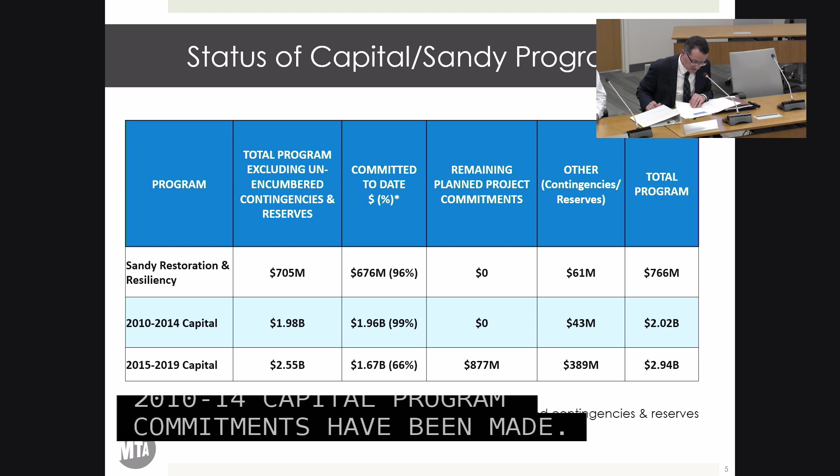Good afternoon. Welcome to Bridges and Tunnels Annual Capital Program Update. In today's presentation, I'll provide updates on our overall program status and major completions, as well as updates on specific programs at the RFK, Henry Hudson, Verrazano, and Throgs Neck bridges. First, overall status. This slide shows the overall status of the capital and Sandy programs. To date, all planned Sandy and 2010 to 14 capital program commitments have been made. We've also committed approximately 2/3 of the 2015 to 19 capital program projects.

Now I'd like to discuss our 2018 commitments. In 2018, B&T committed $730 million of planned $800 million in commitments. In 2019, we plan to commit an additional $877 million.

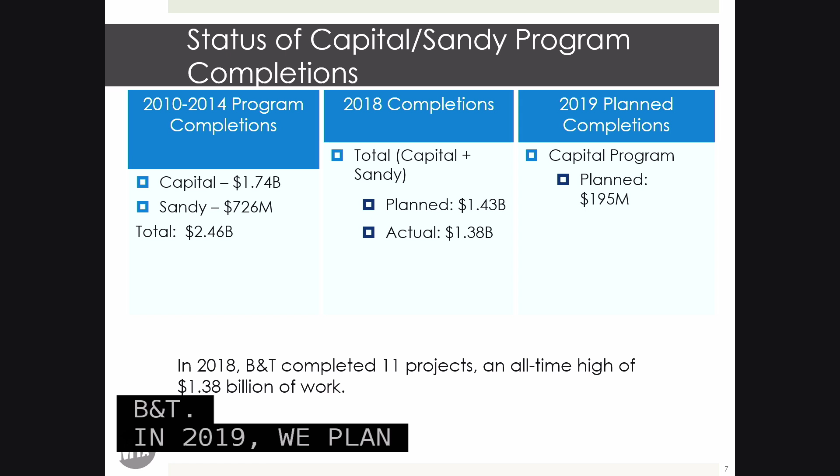This slide shows the status of B&T's program completions. We've completed over 90% of our committed 2010 to 14 capital program projects and 100% of the committed Sandy program projects. In 2018, we completed 11 projects totaling $1.38 billion, which was an all-time high for B&T. In 2019, we plan to complete an additional $195 million of work. We'll now show a short video highlighting our major completions for 2018.

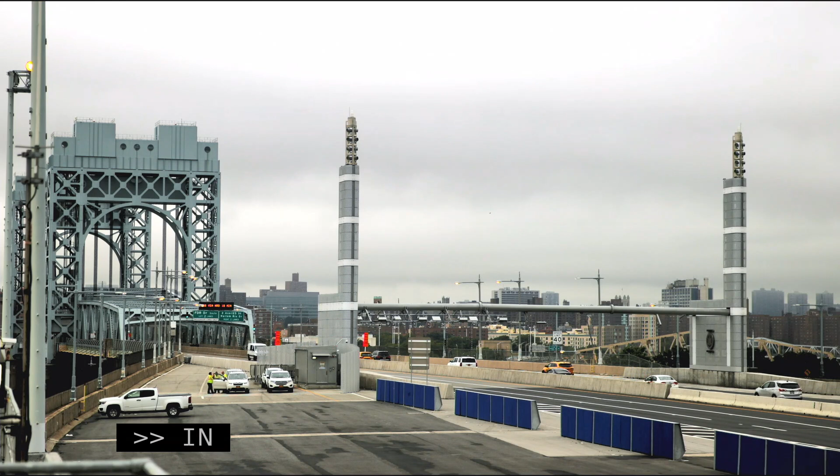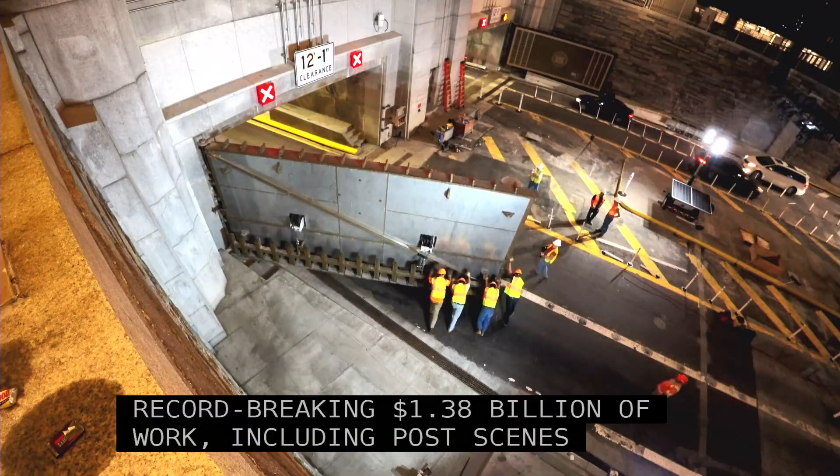In 2018, B&T completed a record-breaking $1.38 billion of work, including post-Sandy reconstruction of the two tunnels, installation of tunnel flood protection, replacement of the Bronx Plaza roadway deck at the RFK Bridge, and structural rehabilitation and painting of the Marine Parkway Bridge. To repair the damage done by Hurricane Sandy to the two tunnels and to improve their resiliency, TBTA awarded 2 contracts with a total value of $588 million.

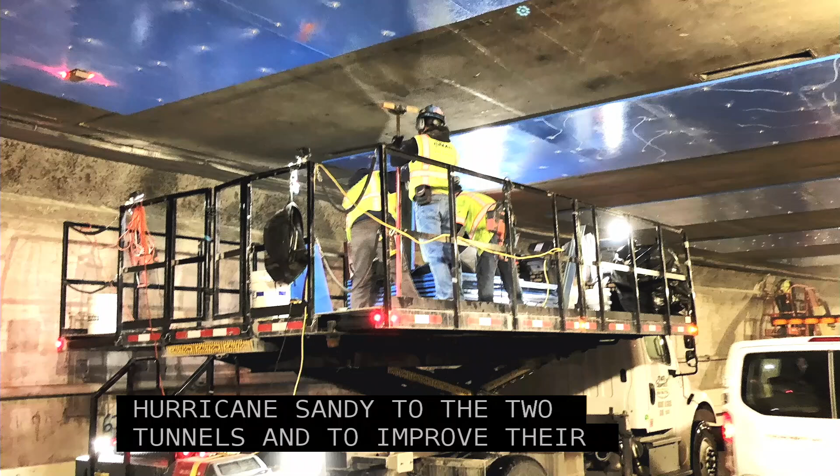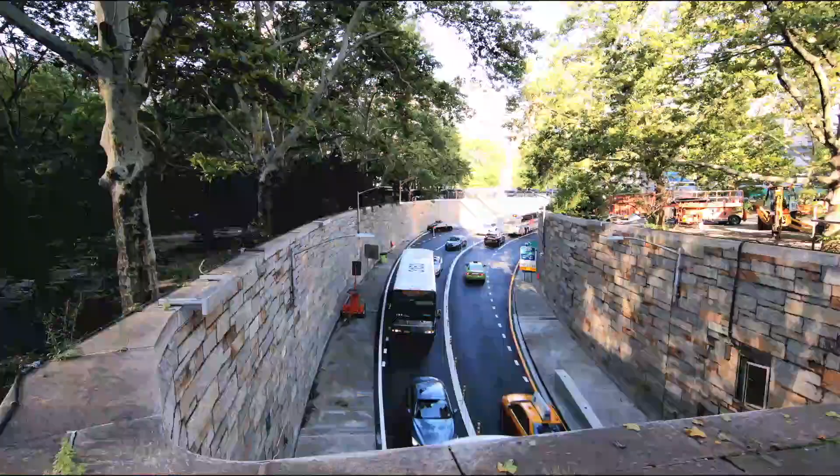New fire lines were cut into the tunnel walls, new fire-resistive ceiling panels were installed, upgraded tunnel LED roadway lighting, and an improved traffic management signage system was installed. The restoration and improvement work at the two tunnels was completed up to 11 months early, significantly benefiting the 140,000 plus customers who cross these two facilities each weekday.

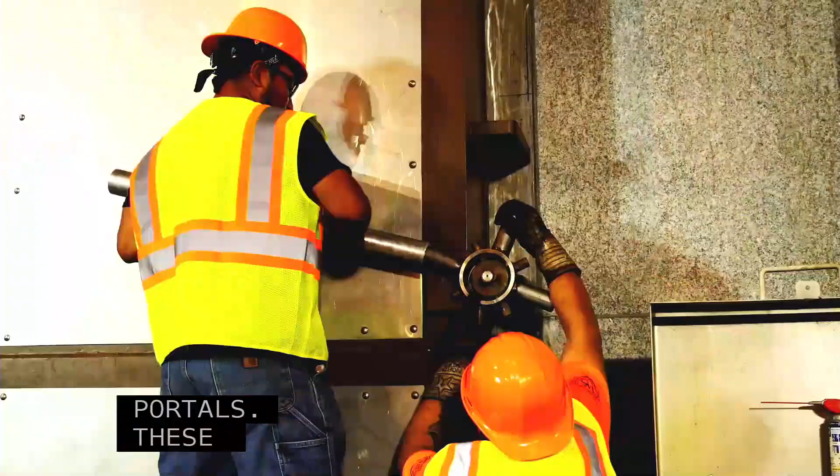To ensure that flooding of the tunnels can never happen again, TBTA has installed 8 flood doors at the tunnel portals. These custom-designed flood doors, weighing up to 50,000 pounds each, can be closed in advance of an expected flooding event, totally sealing off and protecting the interiors of the tunnels.

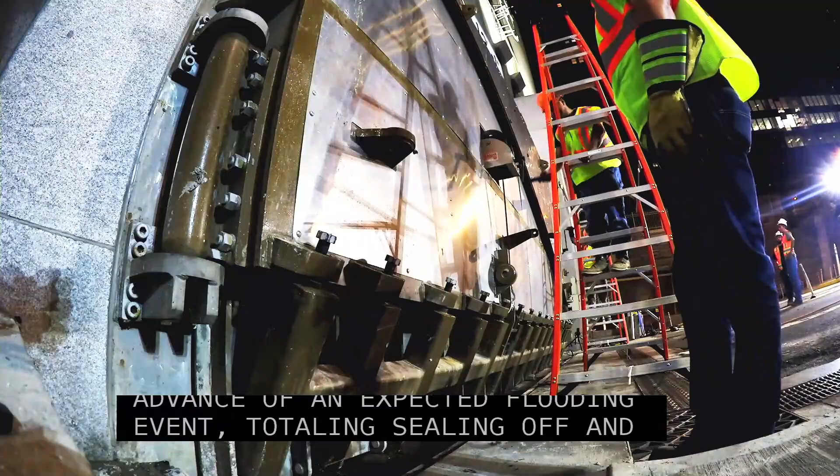In addition, the perimeter seawall around the Hugh L. Carey Tunnel mid-river ventilation building has been raised in height, as it came close to flooding during Sandy and is an area of concern. The tunnel flood protection system is designed to protect to the FEMA 500-year flood elevation, which is nearly 4 feet higher than Sandy peak flood levels.

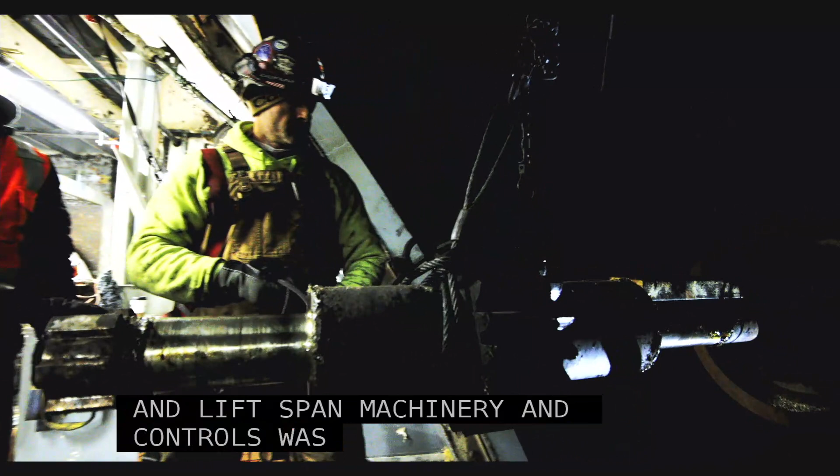At the Marine Parkway Bridge, $100 million in repairs and upgrades to the bridge structure and lift span machinery and controls was completed. All existing equipment was dismantled and removed from the machine rooms at the top of the towers.

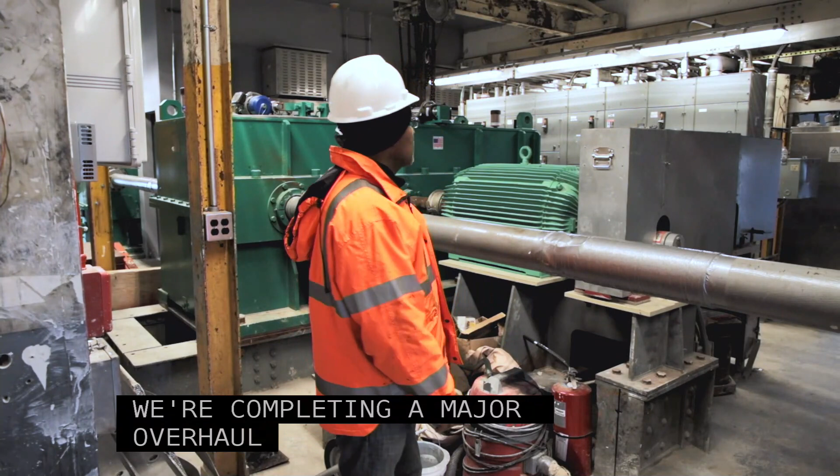Now we're entering the machinery room at the top of the south tower of the Marine Parkway Bridge. This machinery room houses the main lifting equipment for the lift span. We're completing a major overhaul of this lifting equipment. We recently replaced the original 1936 lift span machinery.

Some of the main components of the lift bridge machinery system consist of the motor control center, the primary gearboxes, and 4 electric motors. We have 2 200 horsepower normal motors that operate the bridge in the normal condition, and we have 2 50 horsepower auxiliary motors which operate the bridge if there's an issue with the normal system.

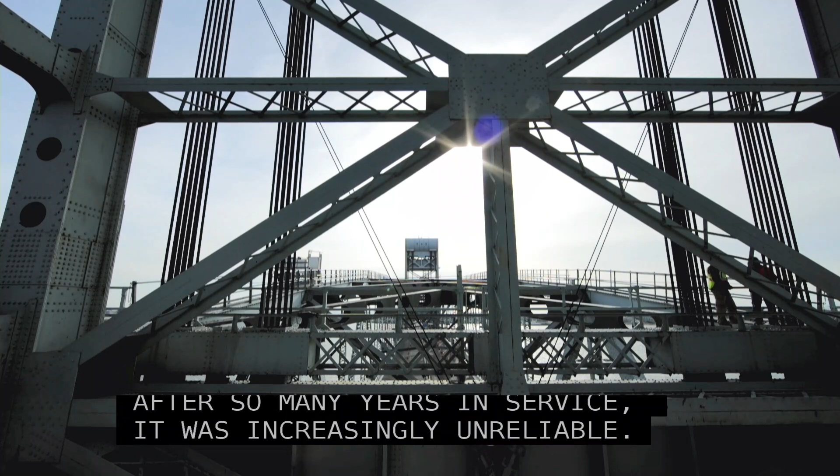This gearbox replaced the original 1936 gearbox. That gearbox served the bridge well. After so many years in service, it was increasingly unreliable. The new lift bridge mechanical system has been in operation for over a year now. In that time, it's performed flawlessly.

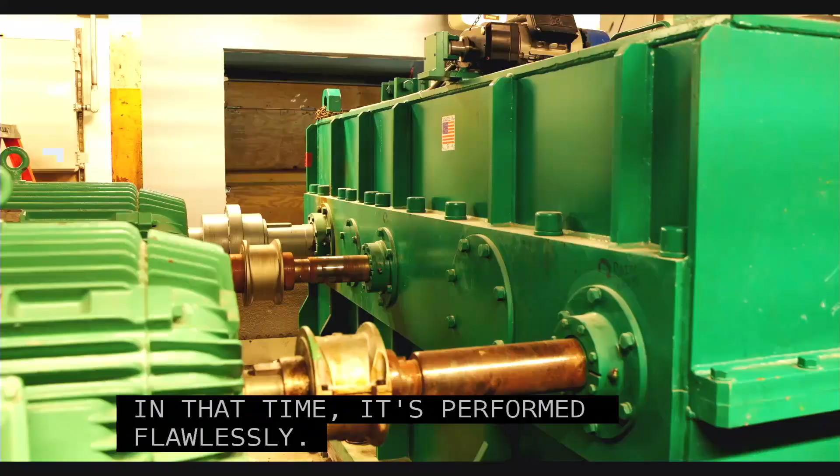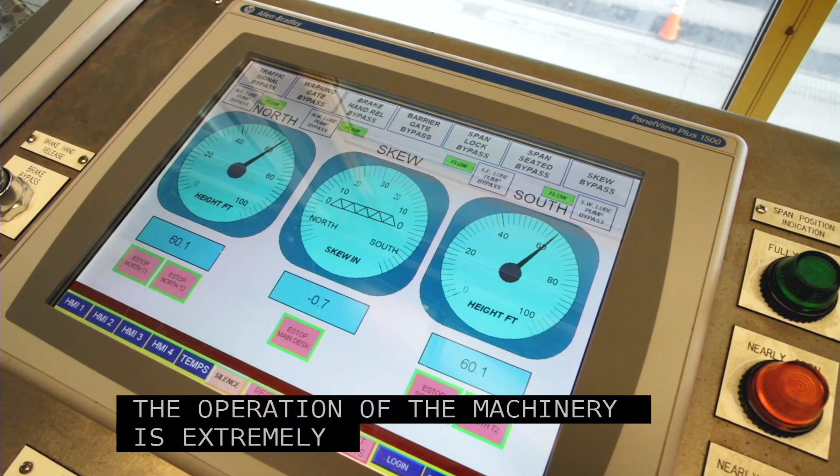It takes approximately 3 minutes to lift the bridge to full height. The operation of the machinery is extremely smooth. The computerized control system maintains the bridge in precise level while the bridge is being lifted and lowered. And in seating the bridge, there are no longer any issues that we had with the original operating system.

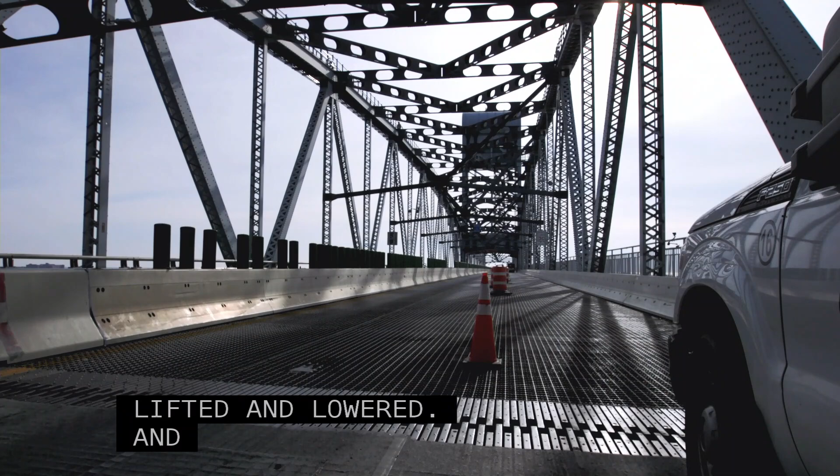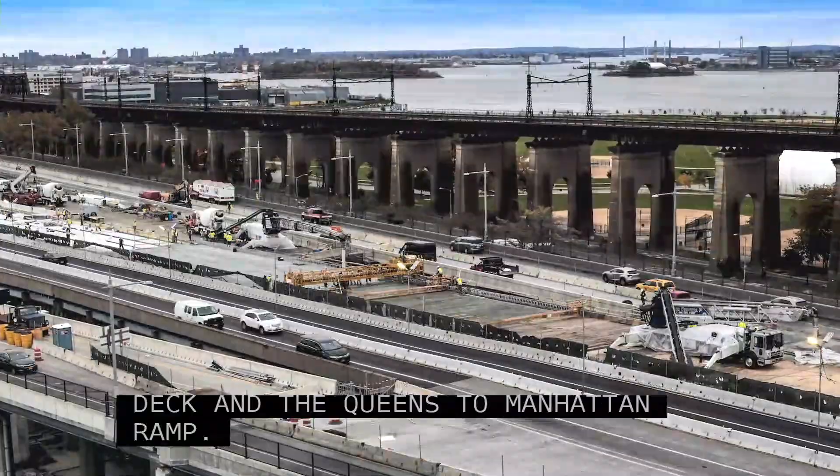At the RFK Bridge, Project RK65A reconstructed and reconfigured 230,000 square feet of the Bronx Toll Plaza roadway deck and the Queens to Manhattan ramp. The project was necessary to restore structural integrity of the elevated structure, to improve roadway safety, and to increase traffic capacity and efficiency.

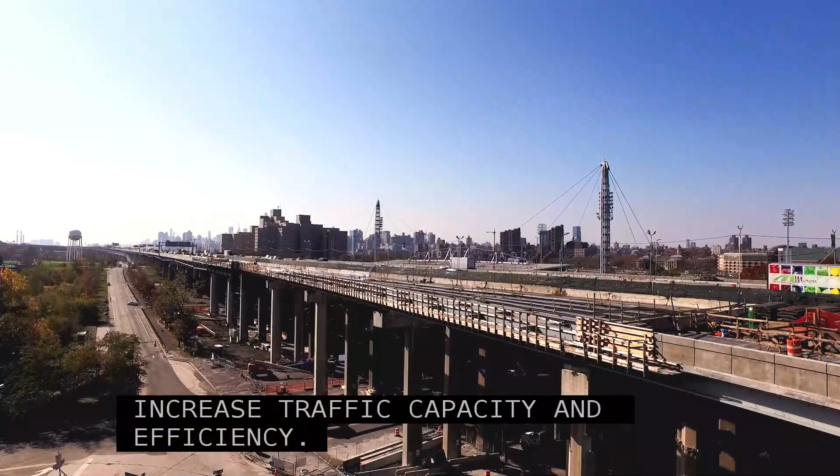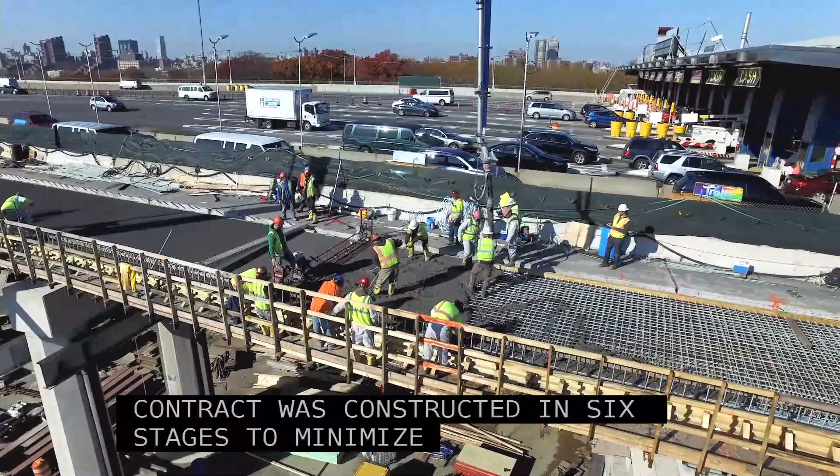This $238 million construction contract was constructed in 6 stages to minimize impact to the 100,000 customers who transit this area each day. The project also included rehabilitation of substructures, structural steel painting, seismic upgrades, new LED roadway lighting, improvements to roadway drainage, and installation of an emergency generator and a new 5 kilovolt electrical feeder.

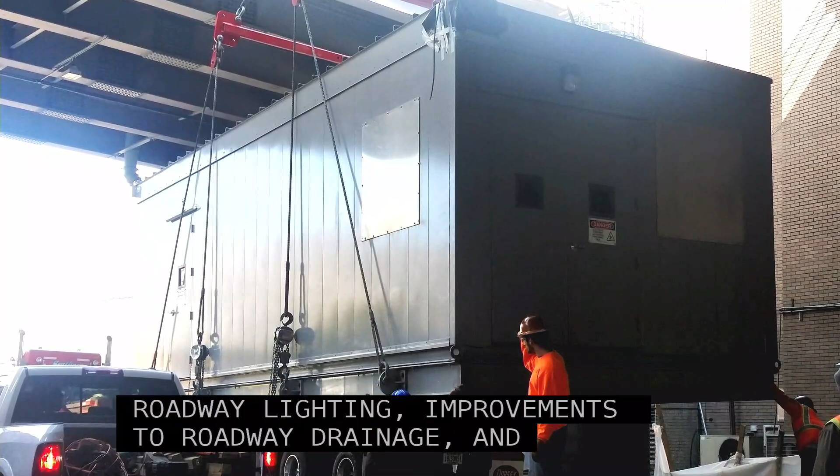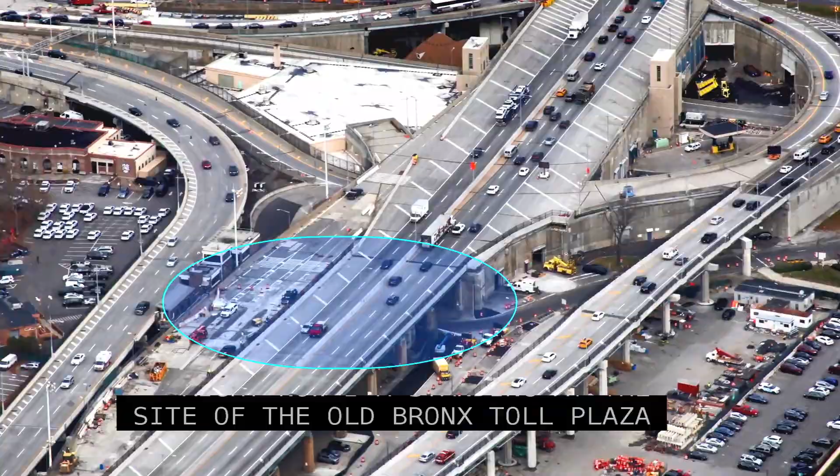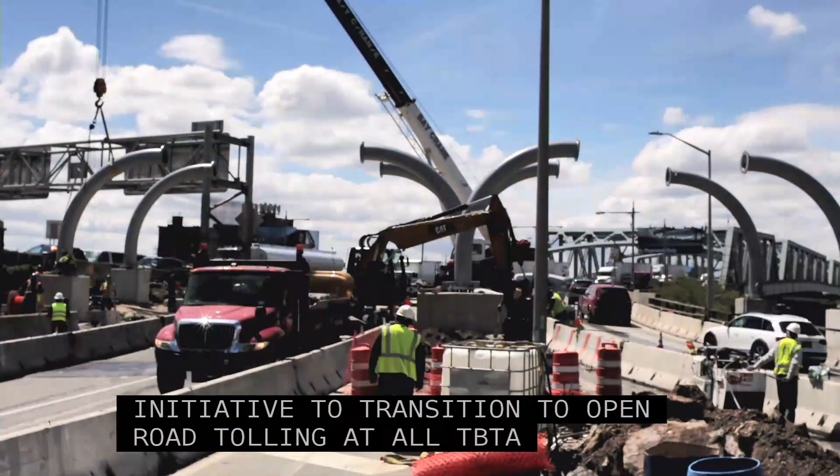Right now, I'm standing at the site of the old Bronx Toll Plaza, which was reconstructed under the RK65A project. As originally bid, the project was to construct a new 16-lane toll plaza. However, in June of 2016, as part of an expedited agency-wide initiative to transition to open road tolling at all TBTA facilities, the RK65A scope of work was modified to require the installation of open road tolling gantries at the Bronx and Queens approaches to the RFK Bridge, and for the demolition of the old Bronx Toll Plaza.

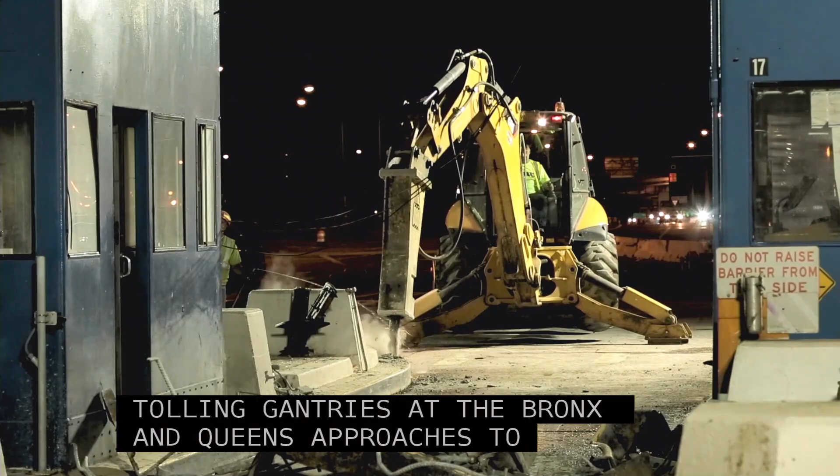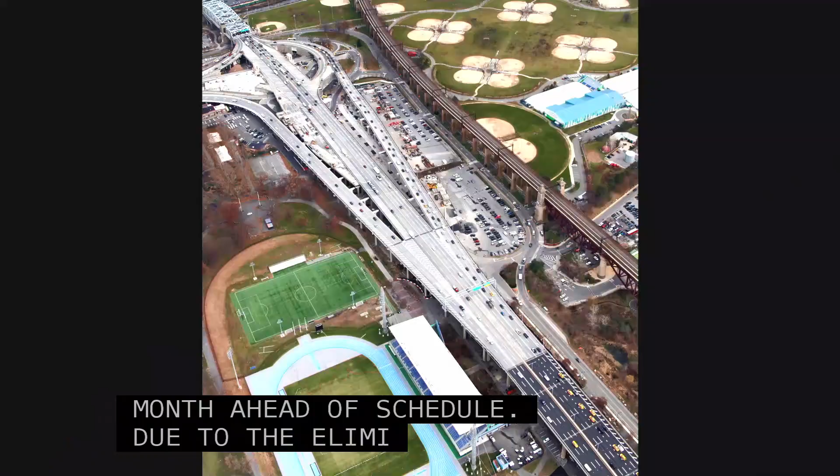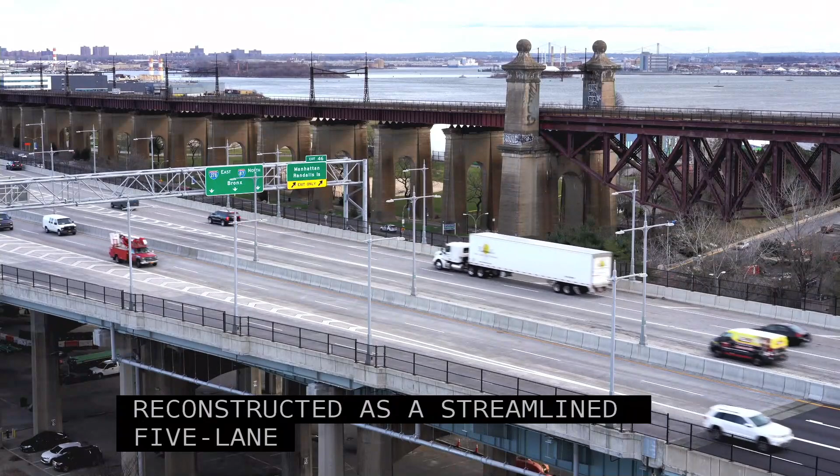As a result of a collaborative, fast-track design and construction approach, ORT Go Live at the RFK Bridge was achieved on June 15th, 2017, 1 month ahead of schedule. Due to the elimination of the toll booths, the old toll plaza area and approach roadways were reconstructed as a streamlined 5-lane viaduct featuring a new horizontal alignment to accommodate higher traffic speeds and improving customer safety and traffic throughput.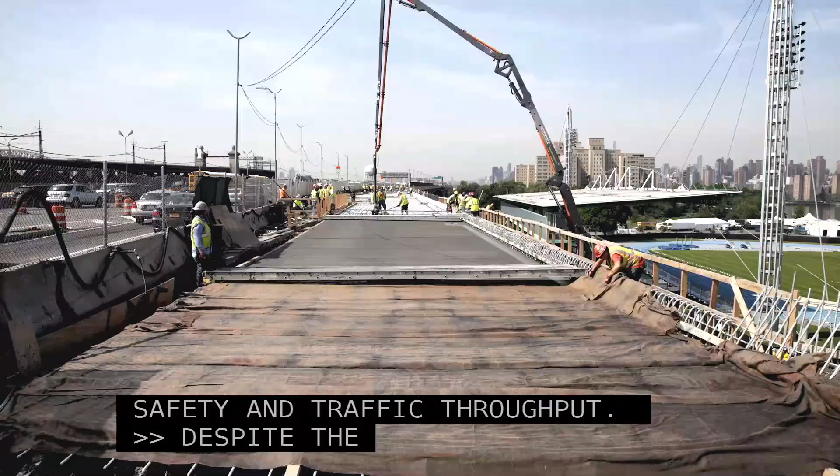Despite the change in scope to incorporate ORT, overall, the project was substantially complete October 31st, 2018, approximately 8 months ahead of schedule. Milestone work impacting mainline traffic was completed 3.5 months early, and the Queens to Manhattan ramp was completed 7 months ahead of schedule, with the contractor earning $2.7 million overall in early completion incentives.

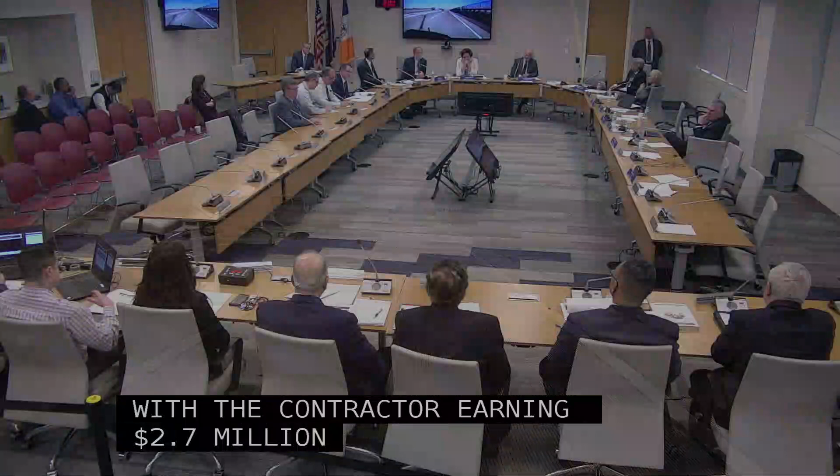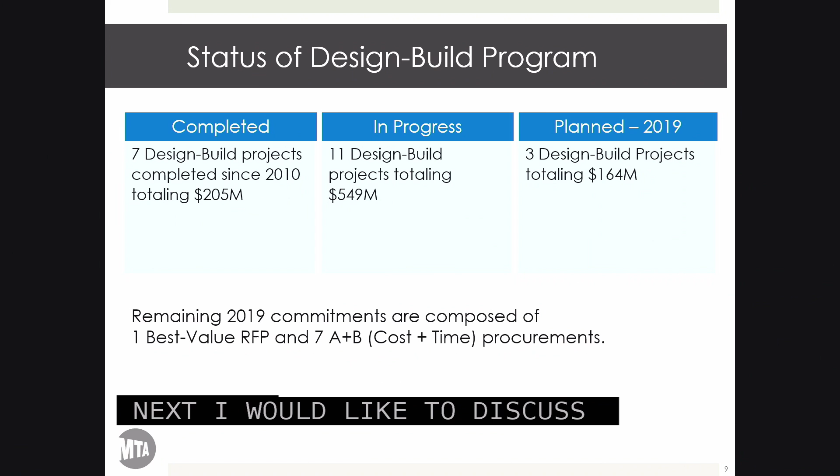Okay. So next I would like to discuss B&T's design build program. Since 2010, we've completed 7 design build projects totaling $205 million in project value. We currently have 11 ongoing design build projects, with another 3 projects planned for 2019. Design build projects make up approximately 24% of our 2015 to 19 capital program. Remaining 2019 planned projects will be bid as either best value RFPs or cost and time procurements.

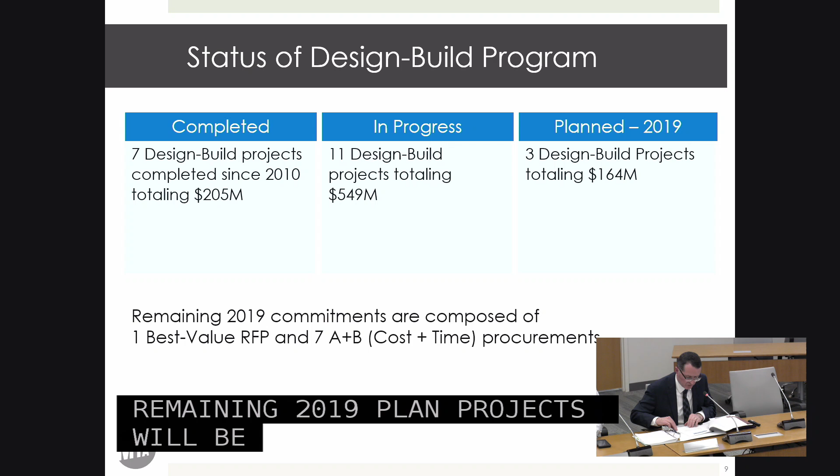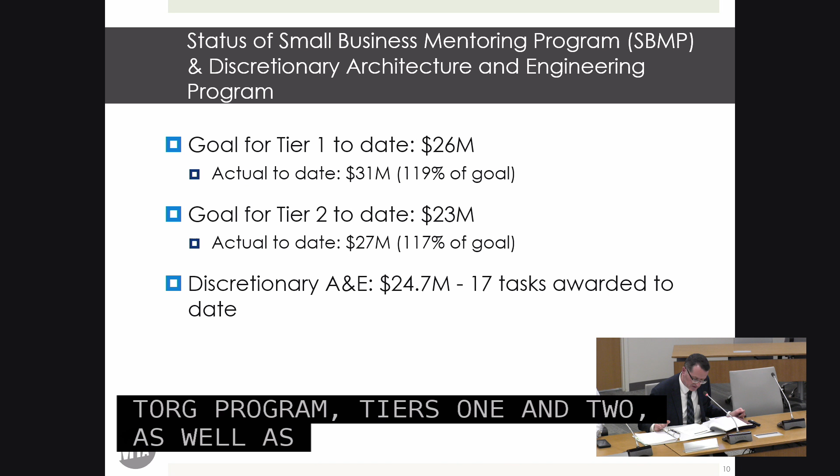This slide takes a look at how we're doing on small business mentoring program, tiers 1 and 2, as well as the A&E discretionary program for consulting firms. As you can see, B&T is exceeding the goals set for the SBMP programs, and we've awarded 17 discretionary A&E tasks, most of which are performing designs for future SBMP projects.

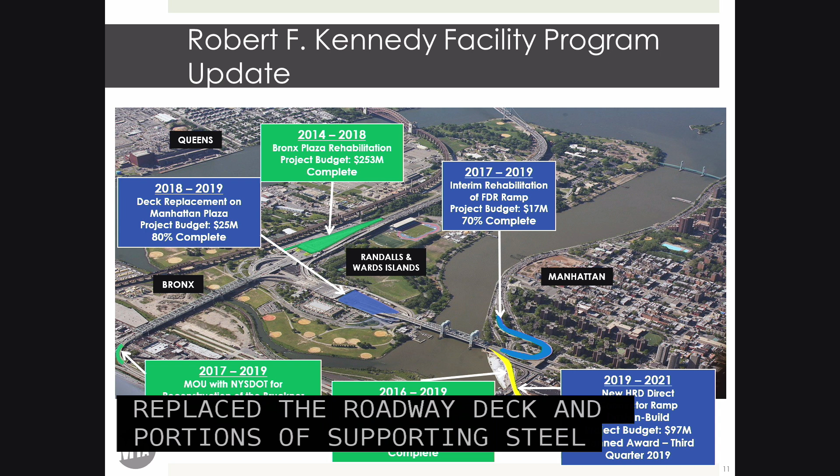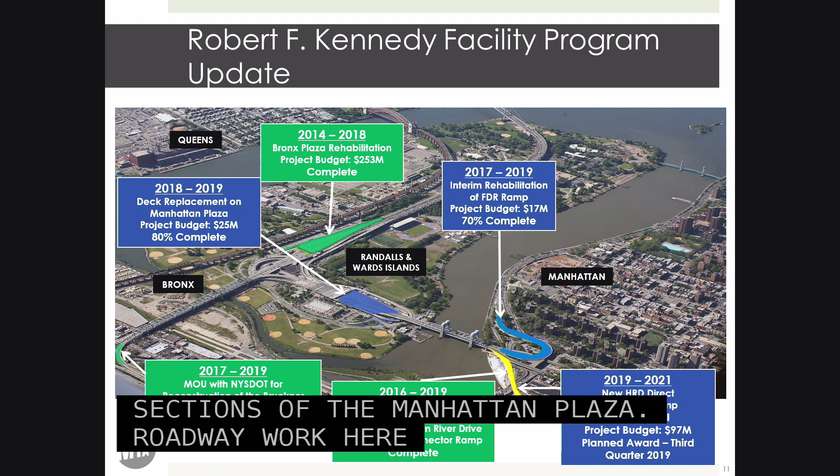Now I'd like to discuss our ongoing program at the RFK Bridge. Highlighted in green is the Bronx Plaza structure, a recently completed project that was featured in the video you just saw, replaced the roadway deck and portions of supporting steel structure. Shown in blue at the center of the page is work ongoing to replace the deteriorated sections of the Manhattan Plaza. Roadway work here is expected to be finished by March 31st this year, in alignment with New York State DOT's reconstruction of the Bruckner Expressway.

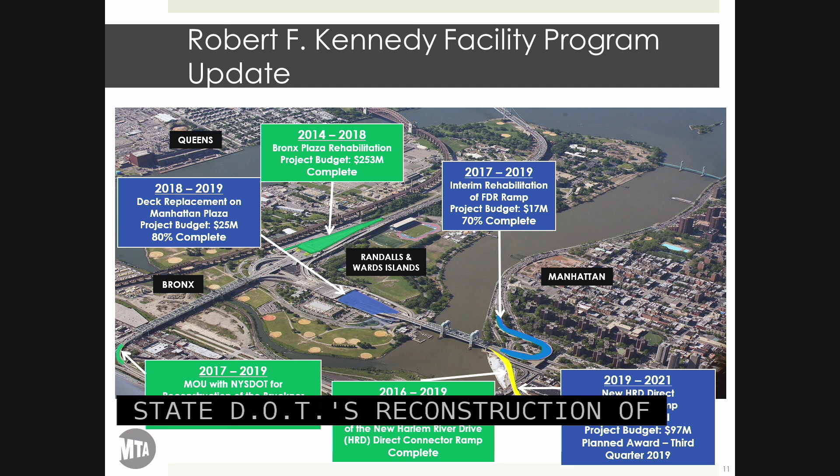Also highlighted in blue at the bottom right quadrant is the FDR ramp, which is undergoing repairs to extend its service life. Impacts to the public there are being minimized by performing the work during off-peak travel times. And highlighted in yellow is the proposed Harlem River Drive direct connector ramp, which I'll discuss in further detail on the next slide.

This slide shows progress made on 3 projects that collectively will result in the construction of a new direct connector from the RFK Bridge to the northbound Harlem River Drive. Phases 1 and 2, shown in green and blue, are complete. Phase 3, shown in yellow, is the construction of the rest of the Harlem River Drive connector ramp.

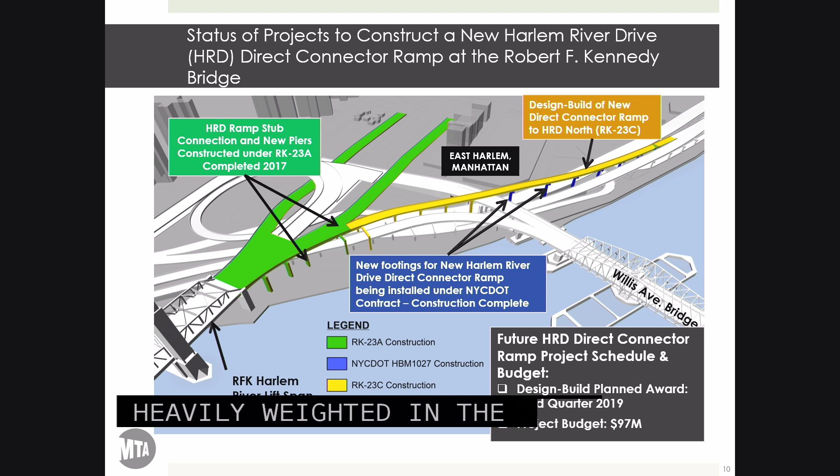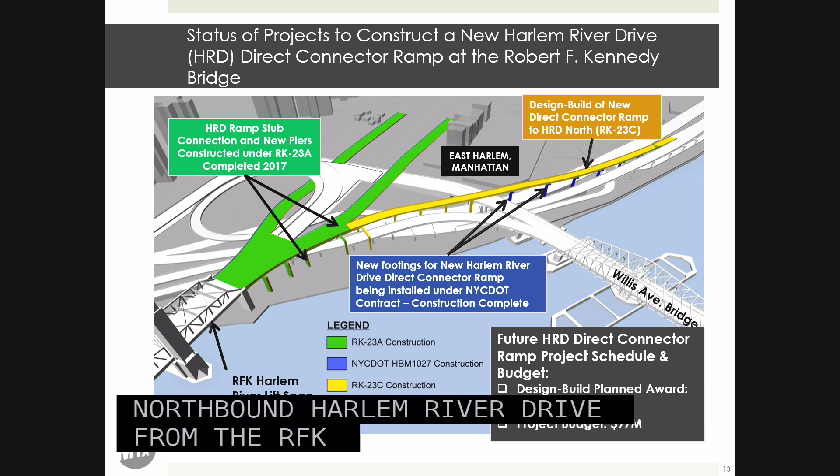The project will be procured this year as a design-build project, with schedule being heavily weighted in the evaluation and selection process. Once complete, this new Harlem River Drive ramp will allow traffic to directly access the northbound Harlem River Drive from the RFK Bridge, avoiding the local city streets, improving regional mobility, and benefiting our customers as well as local community in East Harlem.

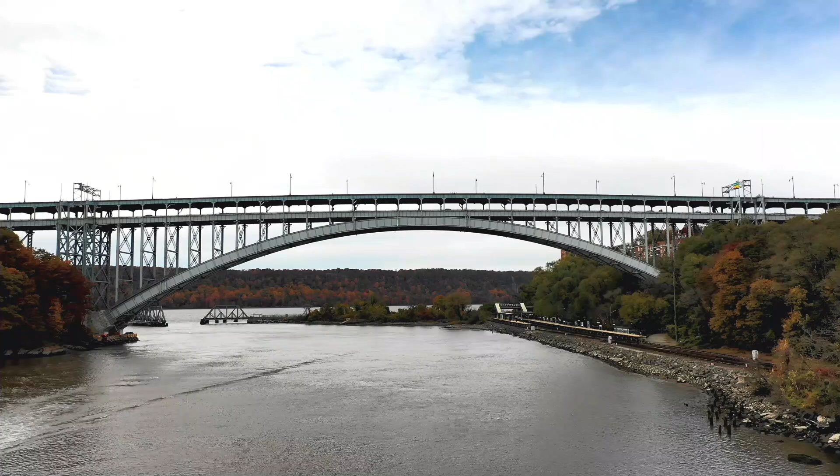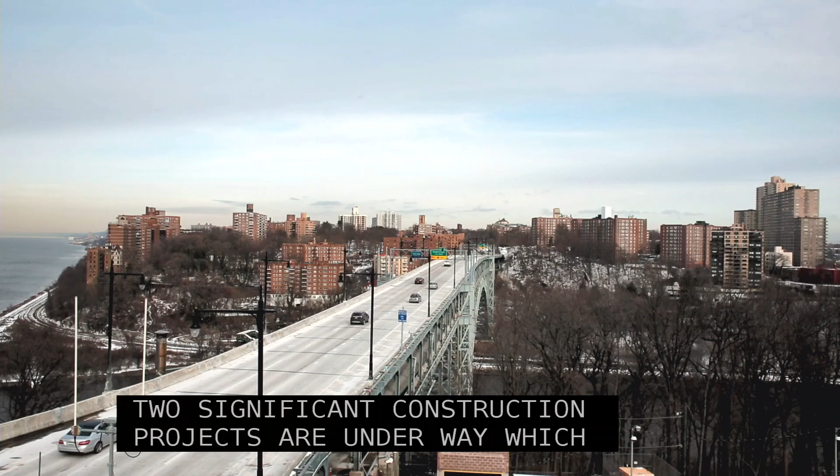Next, we'd like to show a video of ongoing work at the Henry Hudson Bridge, with a video highlighting 2 significant projects ongoing there. At the Henry Hudson Bridge, 2 significant construction projects are underway, which continue the authority's coordinated program of state of good repair and customer experience enhancement work at the facility.

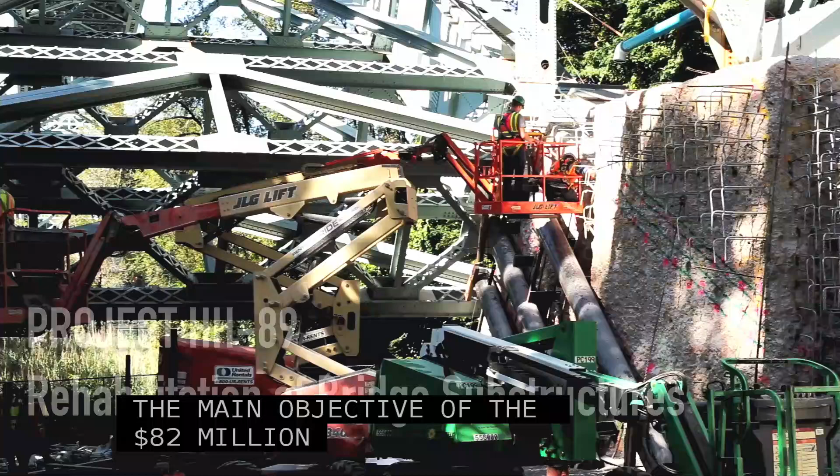These ongoing projects are rehabilitation of the foundation structures for the arch span and approach roadways, and reconstruction of the old toll plaza area and adjacent lower level southbound roadway, and replacement of roadway lighting along the approach parkway to the bridge. The main objective of the $82 million rehabilitation of the foundation structures is to address age-related deterioration in concrete foundation substructures, which date from the 1930s.

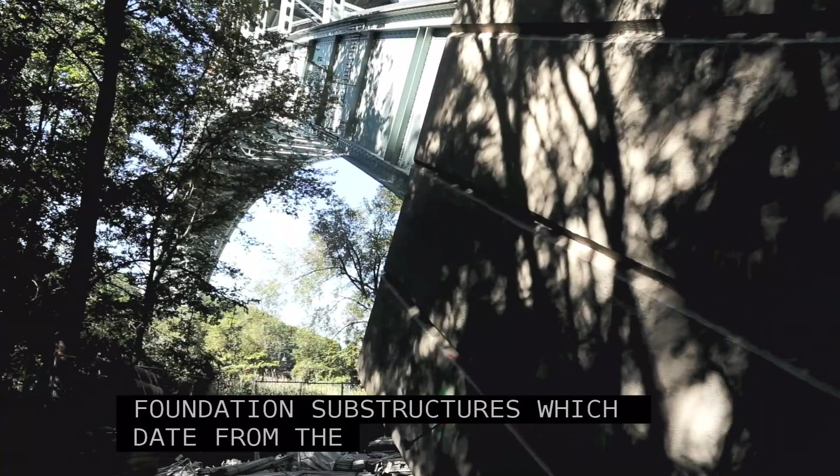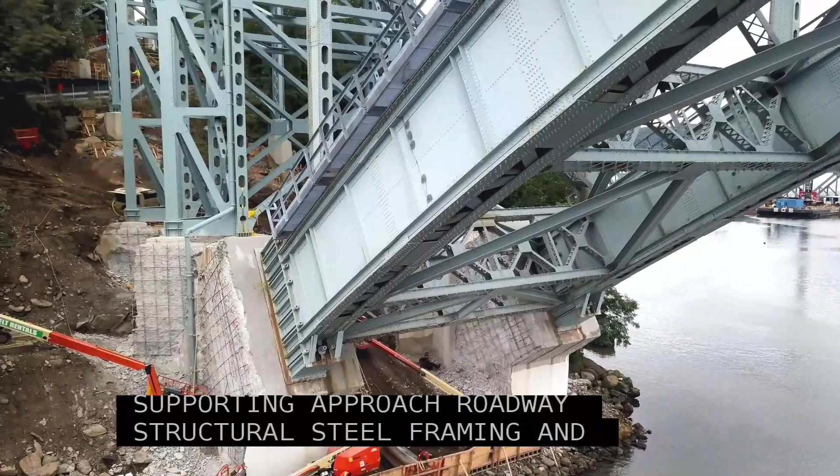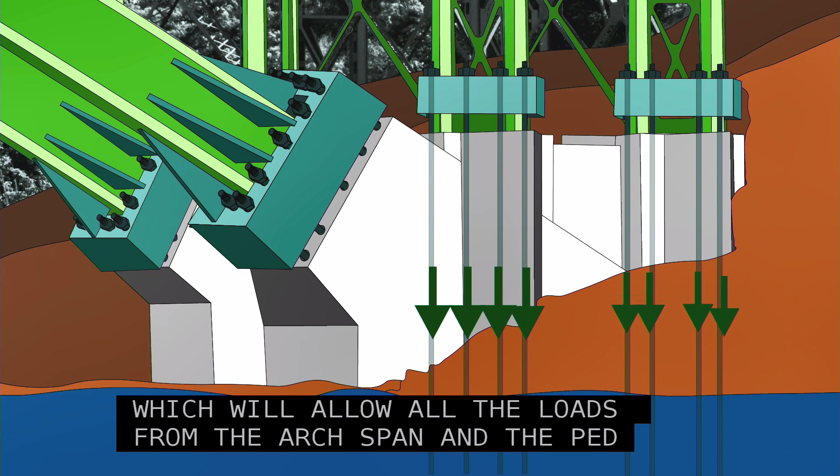The main structures impacted by concrete deterioration at the Henry Hudson Bridge are 16 concrete pedestals supporting approach roadway structural steel framing, and 4 concrete skewbacks which support the base of the bridge's massive 840-foot arch span and adjacent tower columns. To address the skewback concrete deterioration, an alternative load path is being constructed, which will allow all the loads from the arch span and the tower pedestals to bypass the existing skewback structural elements and be transmitted direct to the bedrock below. Currently, the contractor is drilling micropiles on the north skewback.

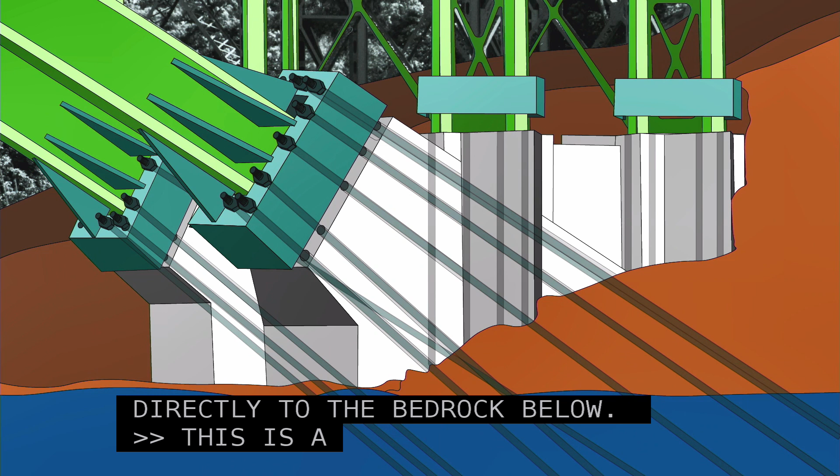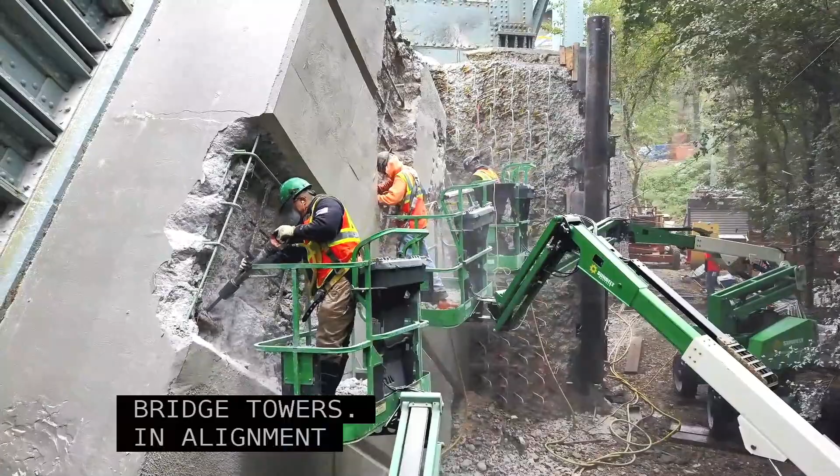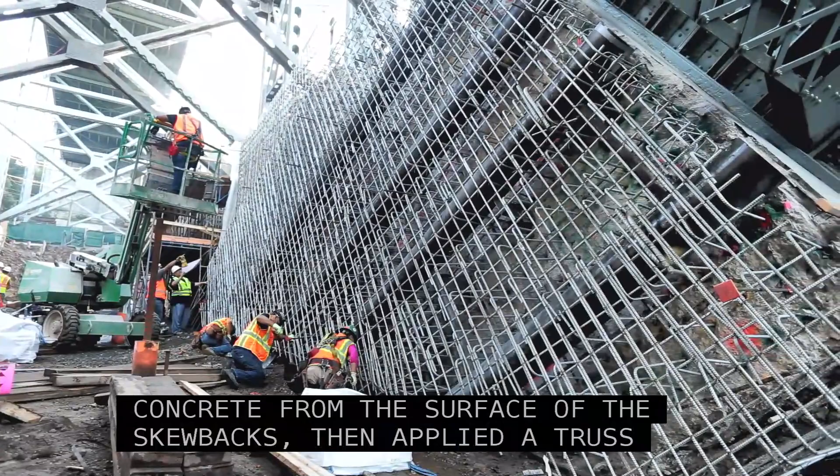It's a complicated operation because the arch micropiles are drilled diagonally and they intersect with the vertical micropiles of the bridge towers. The alignment tolerances are very tight. Prior to drilling of the micropiles, the contractor removed all deteriorated concrete from the surface of the skewbacks, then applied a structural reinforced shotcrete along with guide pipes that help facilitate the installation of the micropiles.

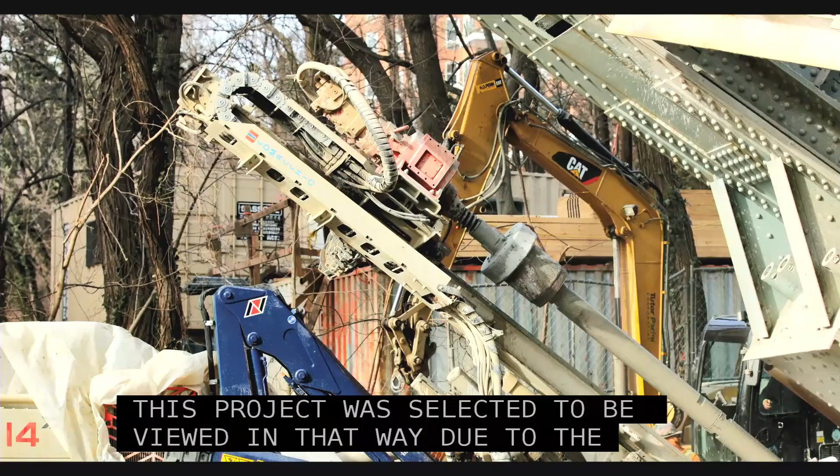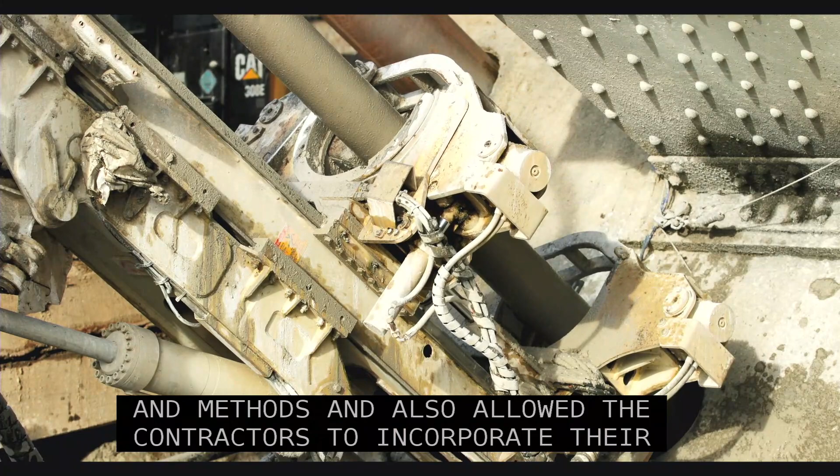In recent years, TBTA has been undertaking a significant percentage of their capital program via the design-build procurement method. This project was selected to be handled in that way due to the complex nature of both its design and construction. This allowed us to look at 5 exceptionally innovative solutions which were based on the contractor's proposed means and methods. It also allowed the contractors to incorporate their schedule for the work. In the end, it allowed TBTA to select the best value option that incorporated schedule, technical solution, and cost.

The contract includes a $500,000 incentive for the contractor to finish up to 3 months early to minimize the impact on the surrounding community. We're currently 45% complete, and we expect to finish on time and within budget.

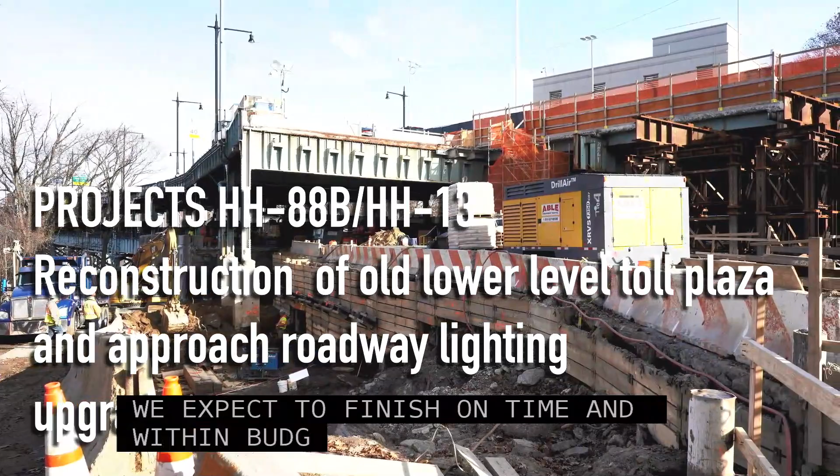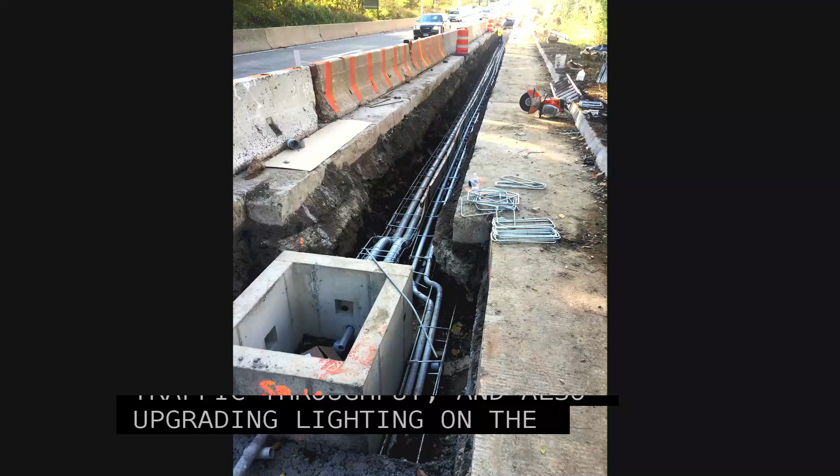Projects, total value $86 million, are ongoing concurrently at the south side of the Henry Hudson Bridge and involve reconfiguring the lower level roadway in the vicinity of the previously removed toll booths to improve roadway alignment, customer safety, and traffic throughput, and also upgrading lighting on approach roadways with new LED light fixtures, improved lighting controls, and centralized power feeds. We're at the south end of the Henry Hudson facility at the old Toll Plaza facility being reconstructed.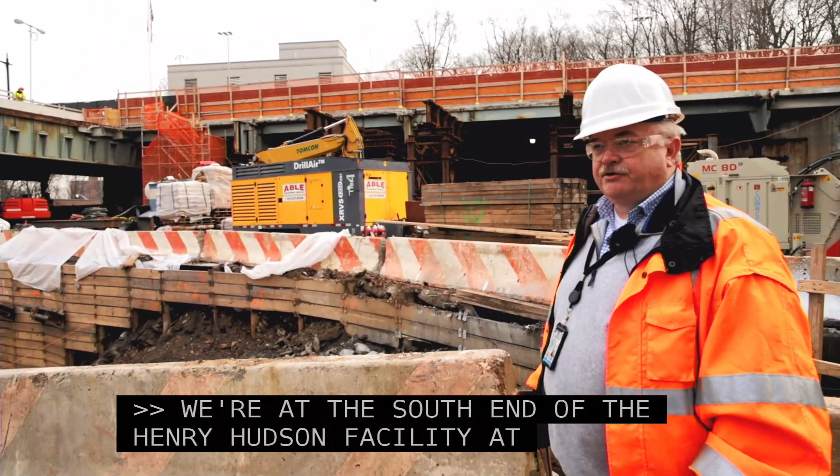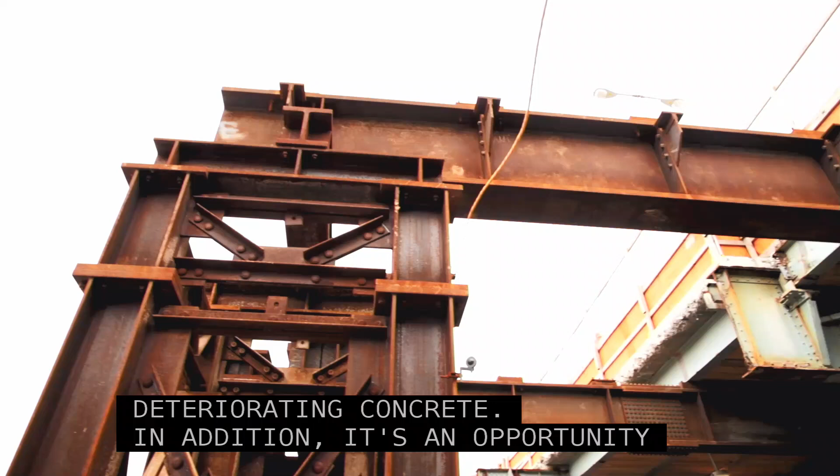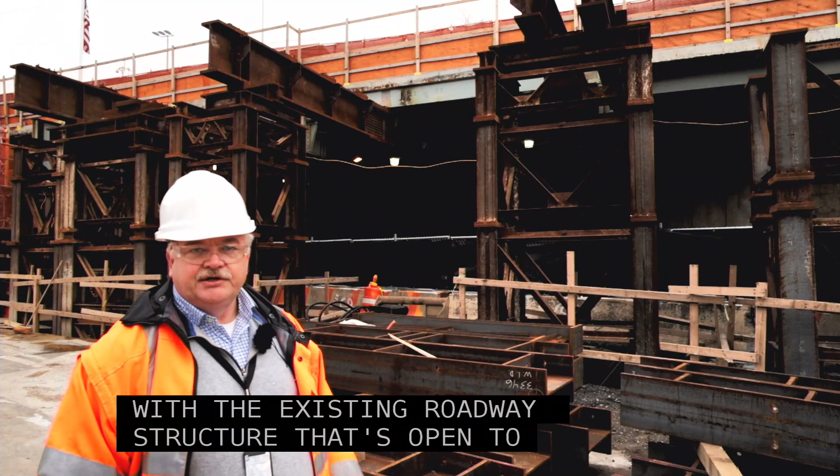This is 1930s construction that has to be replaced because of deteriorating concrete. In addition, it's an opportunity to realign with the new open road tolling system. The project is being reconstructed in two main stages, with the existing roadway structure that's open to traffic being supported on heavy steel shoring structures. This allows us to maintain on the lower level 2 lanes of traffic which match the incoming parkway lanes right through the facility and down south into Manhattan.

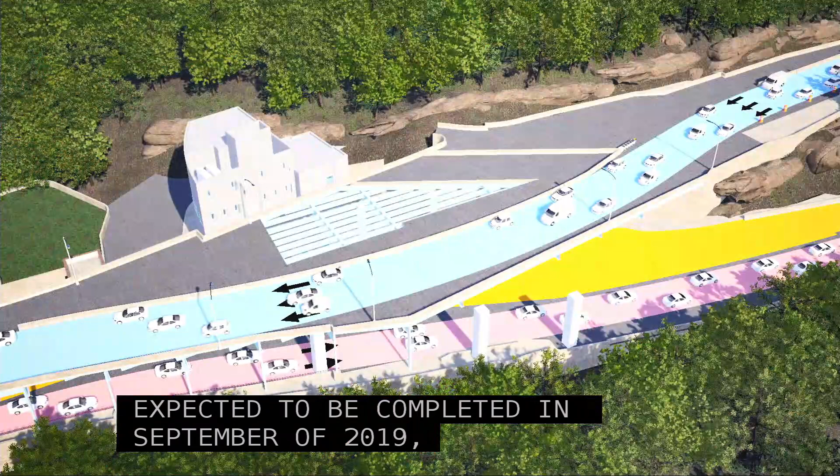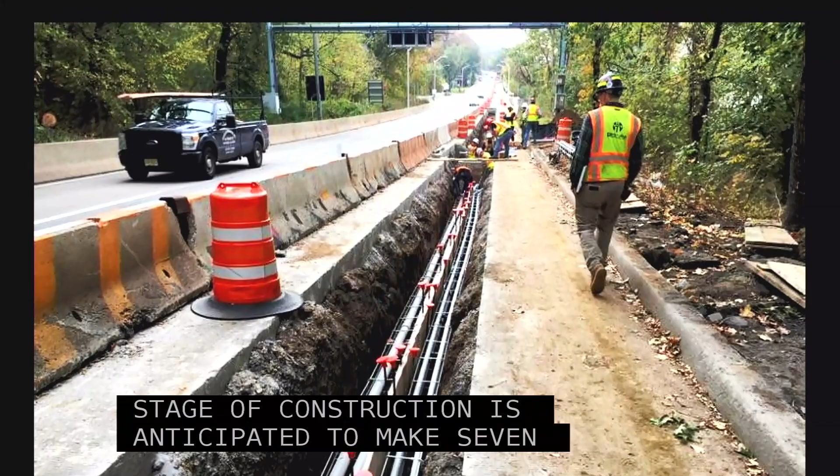It also allows us to maintain 3 lanes of traffic from the south going northbound over the facility. Stage 1 construction is expected to be completed in September of 2019, after which we will transition to Stage 2 construction. During Stage 2 construction, we will continue to maintain 2 lanes of traffic southbound and 3 lanes of traffic northbound. Stage 2 construction is anticipated to take 7 months. Lane closures for the approach roadway lighting upgrades are coordinated with the lane closures in place to perform the reconstruction of the old Toll Plaza areas.

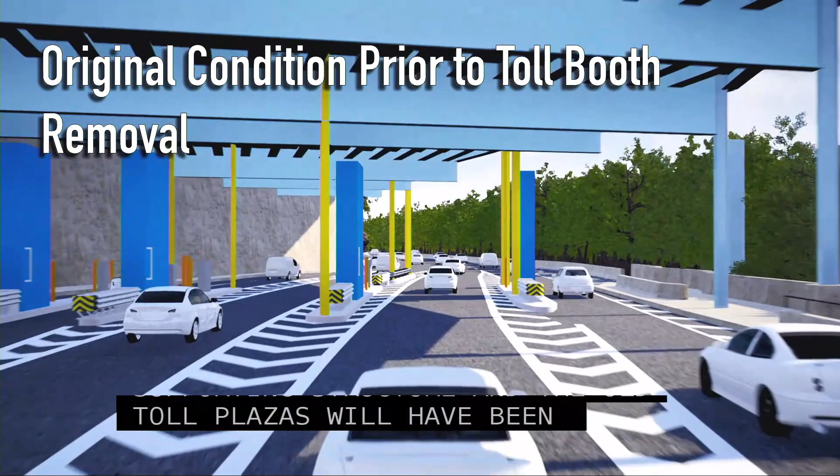At the conclusion of this project, the upper and lower level roadway decks and supporting structure in the vicinity of the old toll plazas will have been completely reconstructed. In particular, lower level columns which once obstructed the lower level roadway will have been completely removed. This column removal will allow for enhancement of the lower level roadway alignment, which in turn will allow for increased traffic throughput and enhanced public safety. In order to minimize the impact on the traveling public, the contract includes an incentive allowance of $2.5 million to finish lower level stages 1 and 2 roadway construction up to 12 months early.

Next, I'll provide an update on the program at the Verrazzano-Narrows Bridge. With the recent completion of the upper level suspended span deck replacement and the opening of the bus HOV lane, attention at the Verrazzano is now turning to reconstruction of the upper level approaches, which are part of the original construction of the bridge and over 55 years old. Reconstruction of a portion of the Verrazzano upper level approaches will be awarded later this year, and I'll discuss this project further in the next slide. In addition to work on the approaches, we will also be awarding a project for structural steel repairs and painting of suspended span steel.

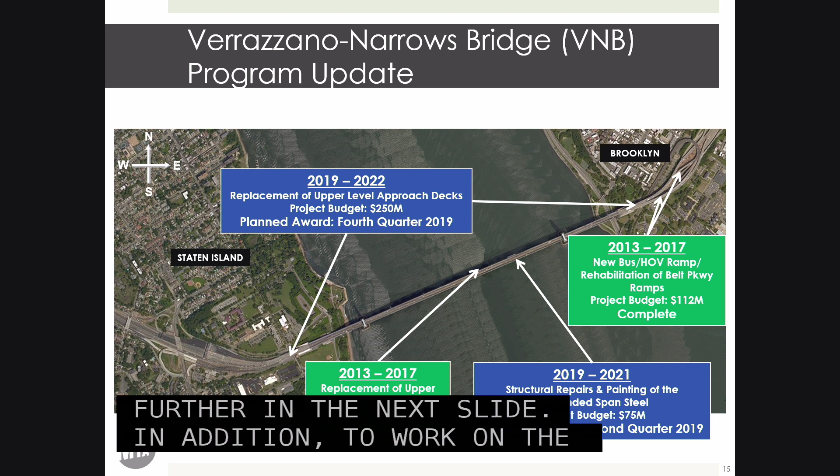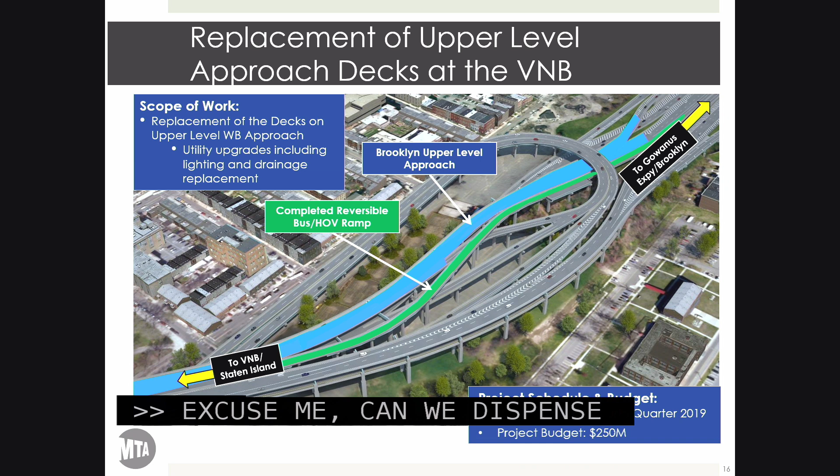Excuse me, can we dispense with the video if it's okay with the committee? I'm sure it is okay. Not that we don't find it enlightening, but the hour is late. Yes. We're done with the video. No more video. We're done. Yeah. Then we're done. Henry Hudson was the last video. Thank you. We're done. Thanks so much. Thank you.

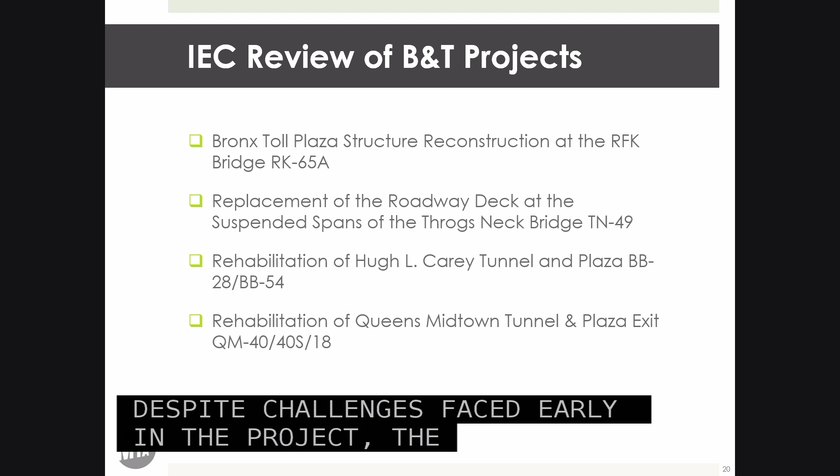IEC. The full IEC report for the B&T projects can be found on page 43 of your CPOC book. Starting with the RFK Bridge Toll Plaza reconstruction, despite challenges faced early in the project, the team completed the work 8 months ahead of schedule, approximately $7 million under budget. The team should be commended for completing the base work, incorporating open road tolling, and withstanding a 2-month stop work order during last summer's Amtrak Penn Station work.

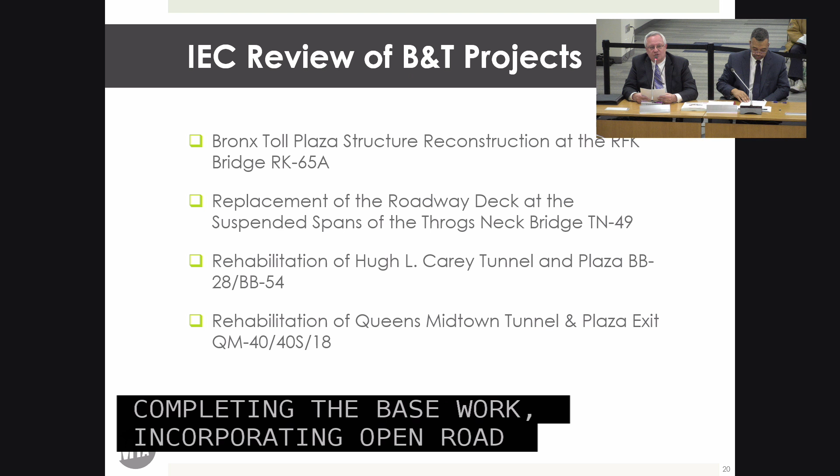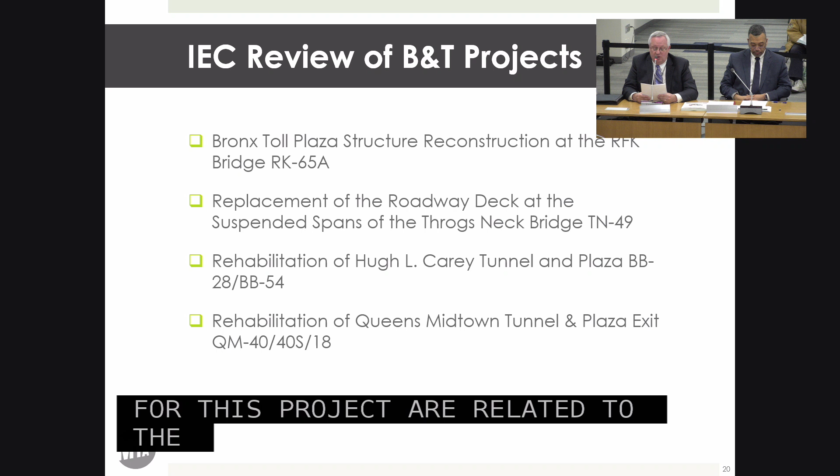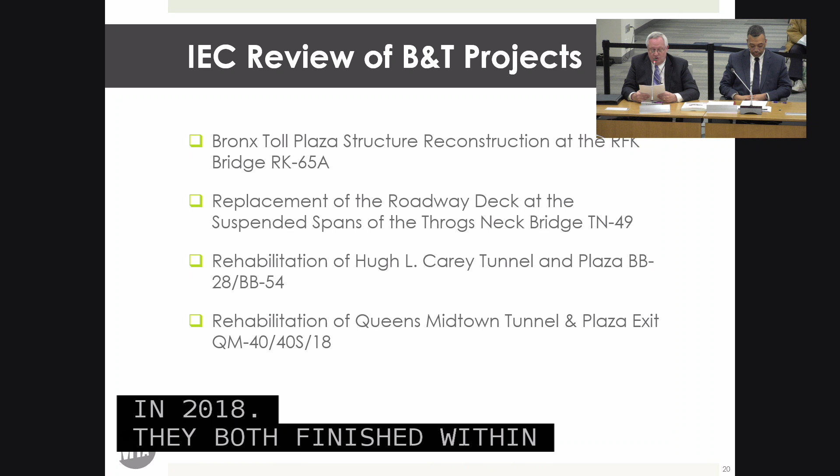At the Throgs Neck Bridge, as you heard, Project TN49 was awarded at a cost lower than the engineer's estimate. The top cost and schedule risks for this project are related to the orthotropic deck panel fabrication and installation. Lessons learned from previous B&T orthotropic deck panel projects have been incorporated into this one. At the tunnels, as you heard from the agency, both Sandy Tunnel projects were completed in 2018. They both finished within budget and on schedule. The 3 completed projects all had less than the planned duration of continuous lane closures, significantly reducing the impact to the traveling public. This will be the last IEC report for these 3 projects, and that concludes our report.

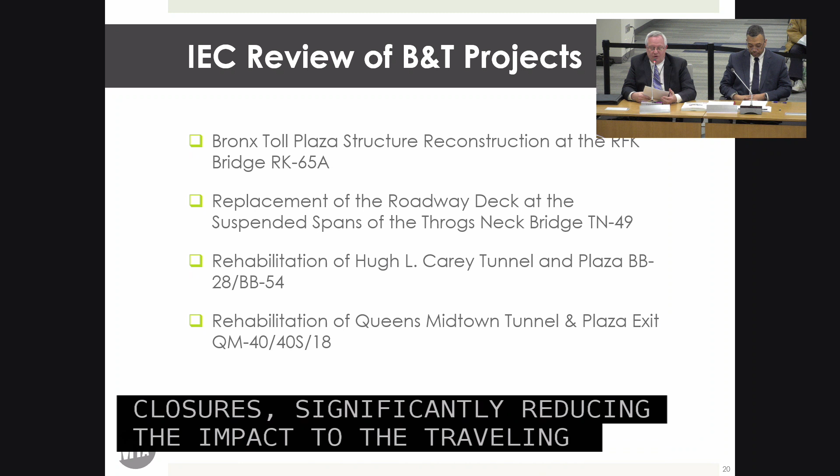Thank you. Any questions? The committee. Dr. Metzger. Just want to say that you're a very modest man, and you deserve commendation. We love hearing that you're on budget and on schedule, and when you finish before schedule and under budget, it's just more than we can hope for. So thank you very much. Thank you. Appreciate it. And do you know anything about PTC?

Is there anything else? Thank you. Oh, I'm sorry. I have one item. Yes. Managing Director Hakim has one, capital program status? Yes, sir. Okay. Thank you. Because this is the January report, the overall 2019 goals for commitments and completions appear respectively on page 49 and 50 of the book. Pleased to say we're off to a good start. There were no planned major commitments scheduled for January, so we haven't slipped anything. And there were 2 major completions scheduled and achieved for January. That concludes my report.